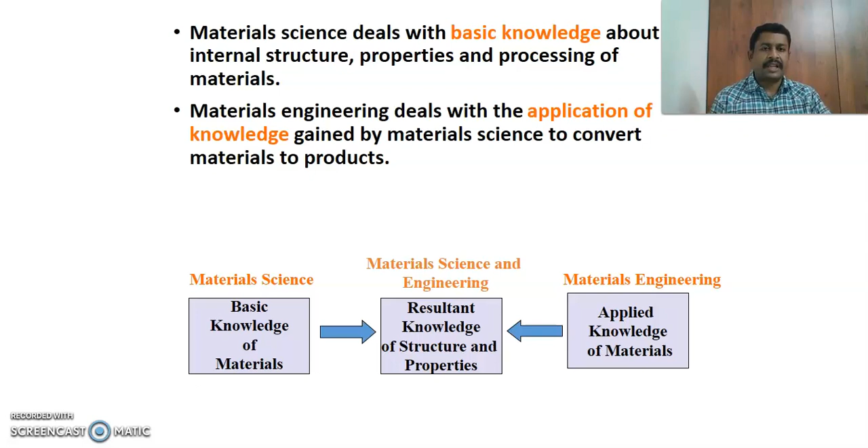There are different types of materials available. The first one is metallic materials and non-metallic materials. Metals and alloys are classified into ferrous and non-ferrous. Ferrous materials means they contain iron content. Examples of ferrous materials are steel and cast iron, and non-ferrous materials do not have iron content.

In ferrous materials, iron is the prime constituent, but in non-ferrous materials, iron is not the prime constituent. Examples of ferrous materials are steel and cast iron, and examples of non-ferrous materials are copper and aluminium. Metallic material is composed of one or more elements, like iron, copper, and aluminium. A metallic element may combine with a non-metallic element, such as silicon carbide, iron oxide, etc. These inorganic materials have a crystalline structure and are very good thermal and electrical conductors.

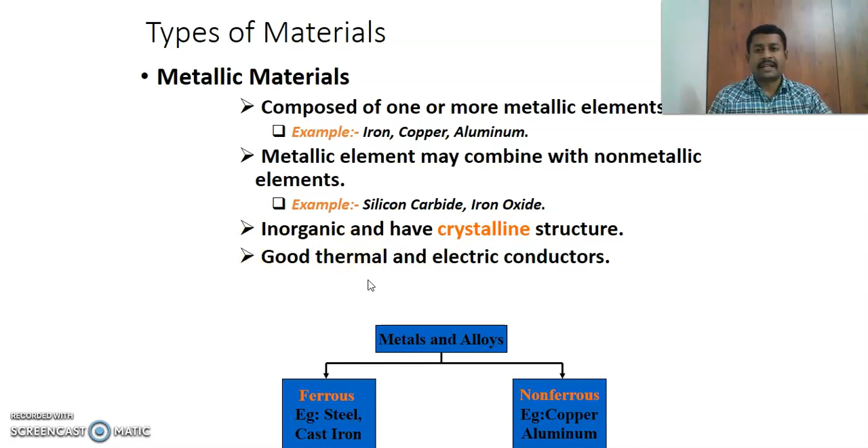In this video, we will mainly study mechanical properties of materials. Before that, what are all the material properties available? There are n number of material properties: first is physical property, second is chemical property, third is electrical property, fourth is magnetic property, fifth is thermal property, next is technological property, and others are aesthetic, economic, optical, acoustical, physico-chemical, psycho-chemical, and other properties.

Physical properties include density, diameter, thickness, and strength-to-weight ratio. Those kinds of properties are called physical properties. Chemical properties include chemical structure, atomic weight, atomic radius, and chemical composition present in the particular material, which are called chemical properties.

Electrical properties include electrical conductivity and electrical resistance, possessed by the material. Magnetic properties determine whether the material is magnetic or non-magnetic, including hysteresis losses; these are called magnetic properties. Thermal properties relate to heat conduction, convection, and radiation - whether it's a heat insulating material or a thermal conducting material, these are called thermal properties.

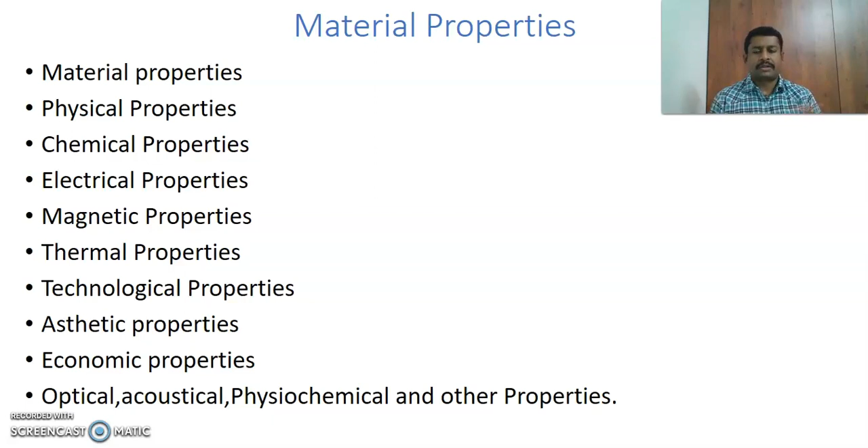Then only we go for applications. Based on the properties, we put the particular material in particular applications. So without knowing the material properties, we cannot go for material applications. So that's why we study one by one what are the properties possessed, what are the characteristics possessed in that particular material. So these are the material properties.

And next we go for the topic mechanical properties and testing. What are the mechanical properties available? So here, generally telling what are the material properties available in the last slide: physical property, optical property, chemical property, mechanical property, acoustic property, electrical property, thermal property.

So those are the general category of properties. Here we can specifically talk about mechanical properties and its testing of materials. So here we are only concentrated about mechanical properties. So what are the mechanical properties available?

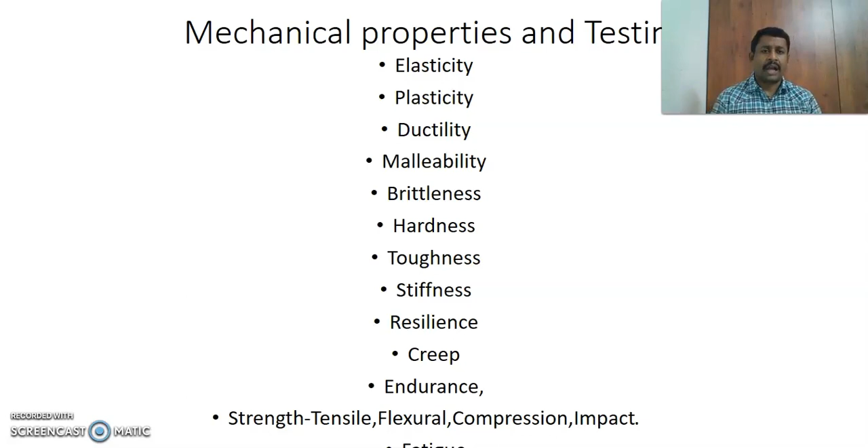That is elasticity, plasticity, ductility, malleability, brittleness, hardness, toughness, stiffness, resilience, creep, fatigue strength, impact strength, endurance limit, flexural strength, compressive strength, tensile strength. So lot more mechanical properties are available. So here we can study one by one.

Before going to know the mechanical properties and its testing, we have to know about the mechanism of plastic deformation, that is mechanism of plastic deformation in the kind of slip and twinning. In the first one, plastic deformation. So what is plastic deformation?

Plastic deformation is a change of material dimension remaining after the removal of load. So after removing the load, what are the material dimension changes? That is change in length, change in diameter, change in height, weight, whatever it may be. That caused by removal of load, the material causes one type of deformation, that is called plastic deformation.

And next one, slip. Slip may be defined as sliding of blocks of crystal over one another along a particular crystallographic plane. So that sliding of crystal blocks over one another is called slip.

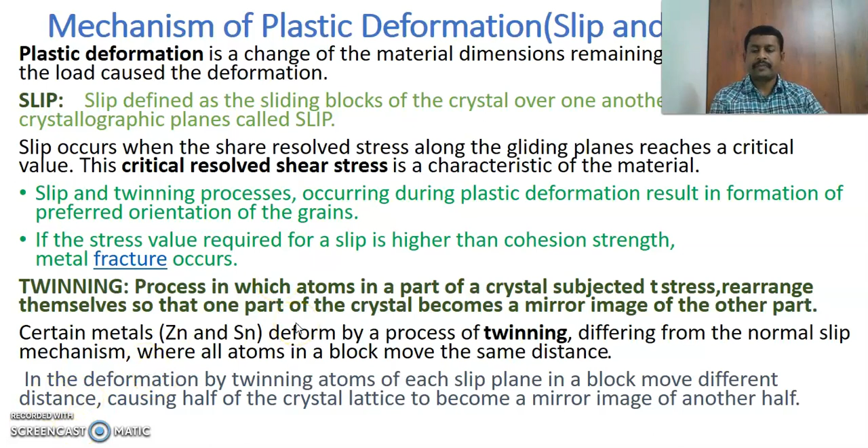This plastic deformation is accompanied by changing both the internal and external state, and it is not reversible. Once it's happened, it's happened. That is permanent deformation that involves distortion of the crystal and microstructure.

This mechanism is carried out in working and shaping processes such as bending, stamping, drawing, spinning, rolling, forging, and extruding. These kinds of shaping processes have to be carried out on a particular material, and plastic deformation will take place.

Examples include the stamping of automobile components, pressing of ship shafting, spinning of aluminum pans, rolling of boiler plates, rails, I-beams, drawing of wire, extension of telephone cables, and forging of crankshafts. All these operations involve plastic deformation in metals and alloys.

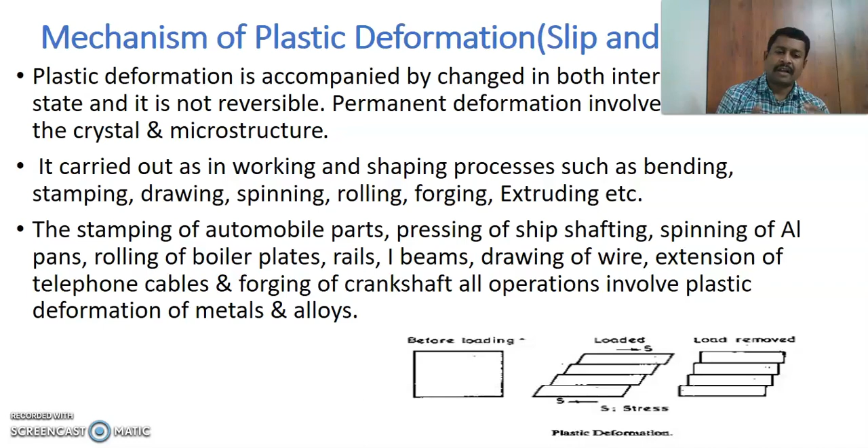Again, the stamping of automobile components, pressing of ship shafting, spinning of aluminum pans, rolling of boiler plates, rails, I-beams, drawing of wire, extension of telephone cables, and forging of crankshafts all involve plastic deformation of metals and alloys.

Now we look at plastic deformation by slip. Slip is defined as the mechanism of deformation where one part of the crystal moves, sliding over another part along a certain crystallographic plane. One block of the crystal moves relative to another along a definite crystallographic plane, called the slip plane. This is the mechanism of deformation where one part of the crystal slips over another part along that particular plane.

Why does this kind of slip occur in metals and alloys? It is due to pure shearing stresses acting across the specimen, irrespective of whether the crystal is subjected to tensile or compressive loads. The specimen subjected to tensile or compressive stress experiences pure shearing stress acting across it, causing slip to occur.

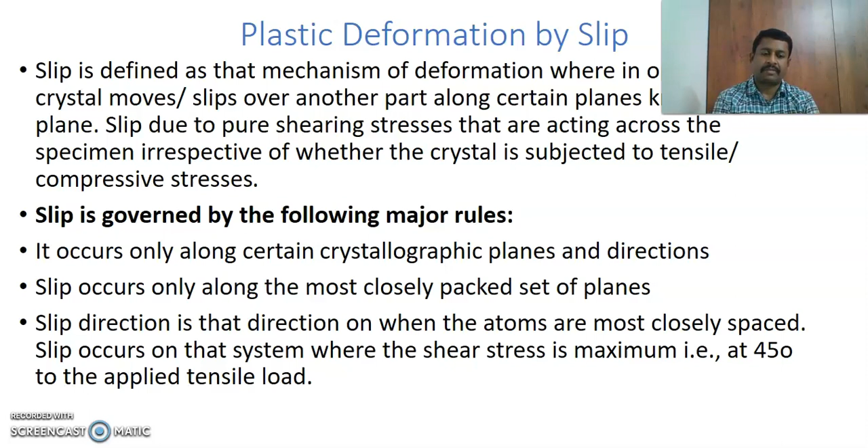Slip is governed by certain rules. First, it occurs only along a particular crystallographic plane and direction, specifically along the most closely packed set of planes. The slip direction is the direction in which atoms are most closely packed, and slip occurs in that particular crystallographic plane and direction. Slip also occurs on the system where shear stress is maximum, for example at 45 degrees to the applied tensile force.

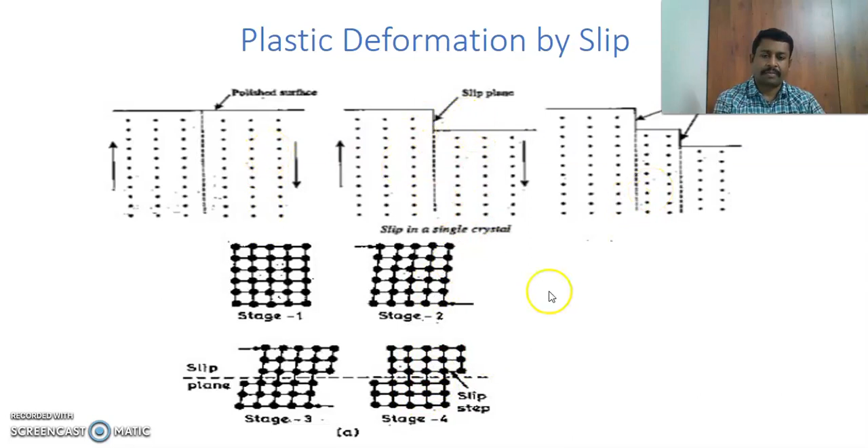Now we discuss the mechanism of plastic deformation by twinning. Here, partial dislocation line moves up and down by one plane, each time the twinning dislocation goes around it. This twinning process may be created by impact, thermal deformation, or thermal treatment involving plastic deformation.

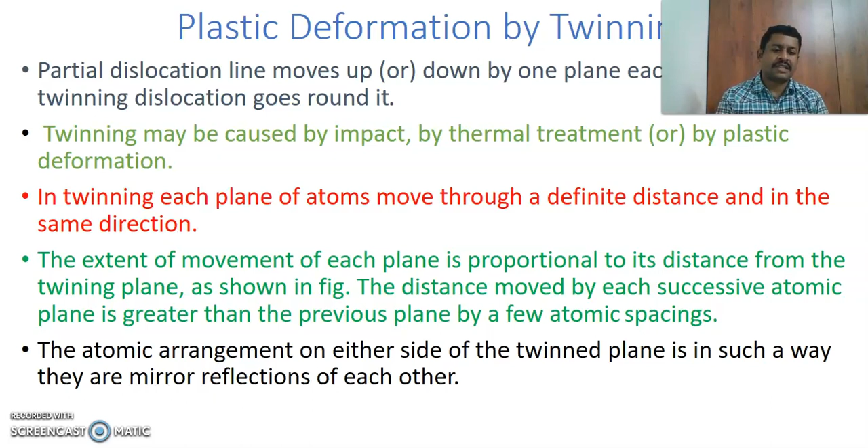In twinning, each plane of atoms moves through a particular distance in the same direction. The extent of movement of each plane is proportional to its distance from the twinning plane, as shown in the diagram, with each successive atomic plane moving a distance greater than the previous one by a few atomic spacings. The atomic arrangement on either side of the twin plane mirrors each other. This is plastic deformation by twinning, showing the twinning plane and twinning direction.

This is the twinned region.

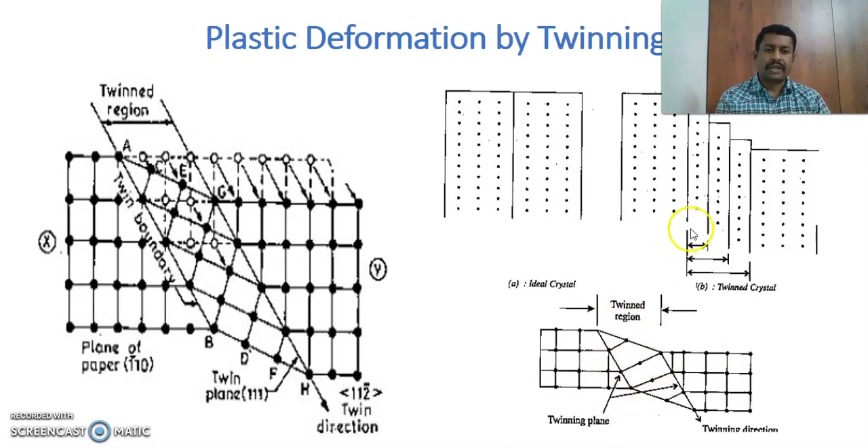We differentiate by slip and twinning, crystal slip and twinning. Slip is the line defect, and twinning is the surface defect or grain boundary defect.

During the slip process, all the atoms in a particular block move the same distance, but in twinning, atoms in each successive plane in a block move through different distances proportional to their distance from the twinning plane.

Slip is commonly observed in BCC and FCC structures of metals, that is body centered cubic and face centered cubic structures. Twinning is commonly observed in hexagonally closed packed structures of metals.

After slip, the crystal axis remains the same, but after twinning, the crystal axis may be deformed. In the slip process, the crystal lattice has the same orientation, but in twinning, the crystal lattice is the mirror image of the original lattice.

The stress needed for slip is comparatively very low, but the stress needed for twinning is comparatively more when compared to slip. Slip can be seen as a thin line under a microscope, but twinning can be seen as a broad line, also viewed under a microscope.

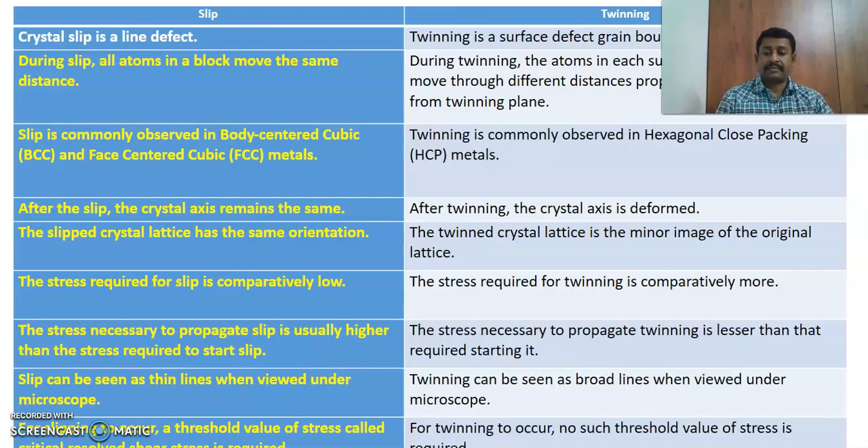Next, fracture of metals and alloys. The process of breaking a solid into a number of pieces due to resultant force acting under stress is called fracture.

There are two stages of fracture: crack formation and crack propagation.

In this classification, the first one is ductile fracture. Ductile materials undergo considerable plastic deformation and absorb a significant amount of energy before fracture. A crack formed as a result of ductile fracture propagates very slowly as the stress is increased.

Plastic deformation in a multi-phase material creates formation of voids at inclusions in the boundaries also. These holes or voids give the specific appearance of the ductile fracture surface, consisting of numerous spherical micro cavities, or dimples, that initiate the crack, and then the crack propagates and fracture occurs.

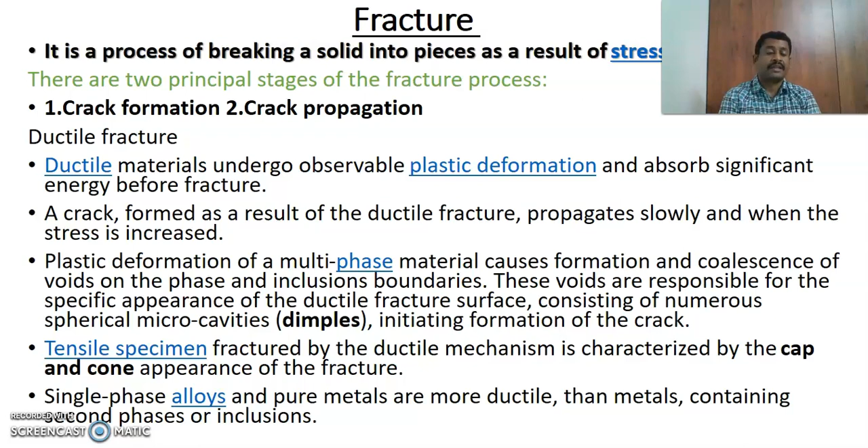Up to now we've seen ductile fracture. Another type is brittle fracture, which shows very low plastic deformation and low energy absorption before fracture occurs.

The crack formed as a result of brittle fracture propagates fast without much increase in the stress applied to the metal or alloy. This brittle crack is perpendicular to the stress direction.

There are two possible ways of brittle fracture: transcrystalline, or transgranular cleavage, and intercrystalline, that is intergranular fracture.

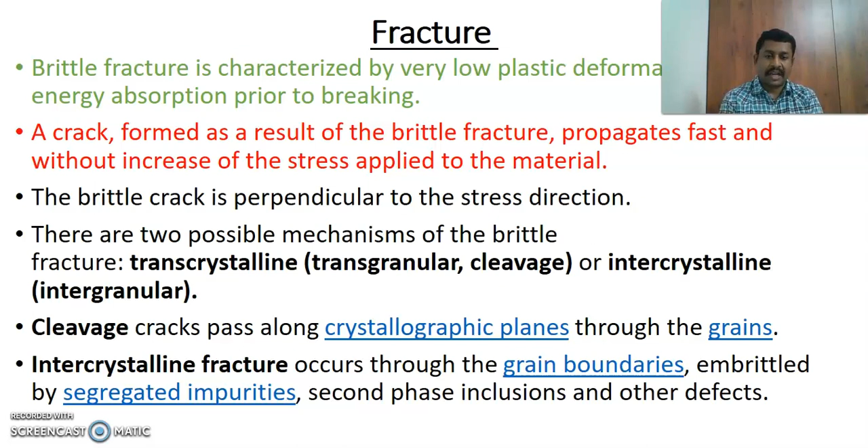Cleavage cracks pass along the crystallographic plane through the grains, while intercrystalline fracture occurs through the grain boundaries that are embrittled by segregated impurities, second phase, inclusions or other defects.

This is the ductile and brittle fracture mechanism. In the schematic diagram, stress is applied in this direction for ductile fracture, and this is the brittle fracture.

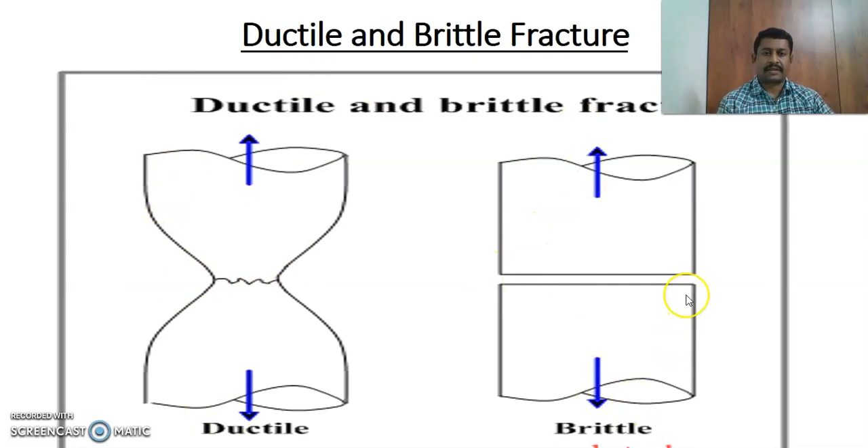How do we test the material under compression, shear and tensile loads? Before we get into testing of materials, there are two kinds of testing available: first is destructive testing, and second is non-destructive testing.

Mechanical tests may be grouped into destructive and non-destructive tests. Destructive tests are tests which are carried out to the point of the specimen's failure. As the name shows, destructive testing means we have to destroy the material and then find its properties.

That is, we have to destroy the material, waste the material, fracture the material, cause failure in the material, and then find the properties of the material. That is called destructive testing.

Examples of destructive testing are the tensile test, compressive test, hardness test, shear test, Izod test, and impact test. For those kinds of tests, we have to prepare a specimen and then break it. After applying the load, the material will be destroyed.

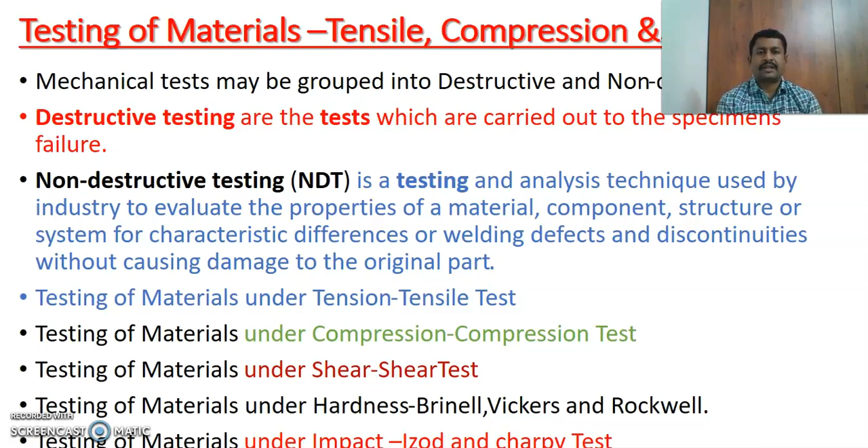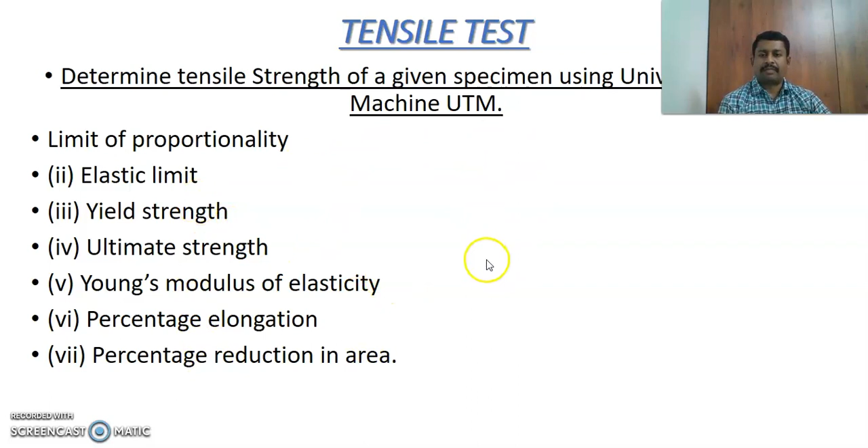So the first one, tensile test, is used to find the tensile strength of a given specimen. In this test we have to find the elastic limit, yield strength, ultimate tensile strength, Young's modulus, percentage of elongation, and reduction in the respective area. These are the properties we have to study while conducting the tensile testing.

This is the tensile test universal testing machine. These are the specimens, and we have to place the specimen in this position and apply the tensile load. This is the specimen, this is the upper jaw, this is the lower jaw, this is the vertical frame, and we have to move the jaw.

The reading is noted here, and this is the elastic deformation up to this point. Here necking occurs, and finally the necking fracture. Fracture will occur in the tensile testing specimen. This is the fractured strength, and this is the necking. This peak point is called the ultimate tensile strength, and here we draw the curve. So necking and fracture occur here, and this is called tensile testing.

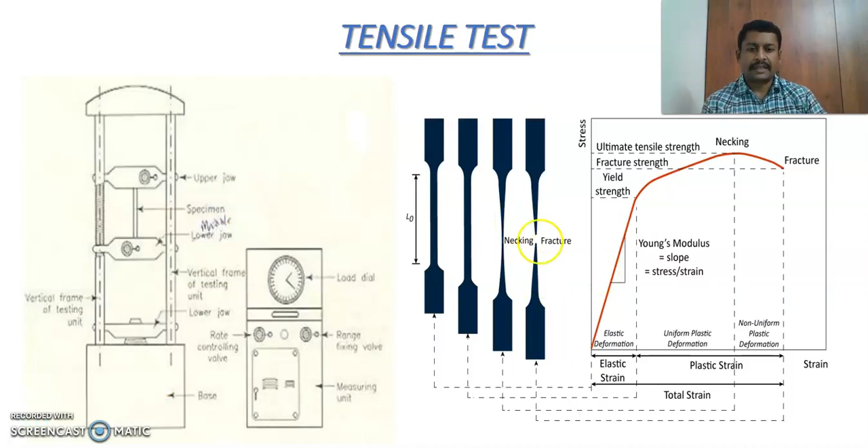In this tensile test specimen, this is the overall length, and the distance between two shoulders is the gauge length. This is the width of the specimen, this is the gripping section, and these two sides are the gripping sections.

When we put the specimen into the tensile testing machine, specimens are placed in the grips of the universal testing machine at a specified grip separation, and the specimen is pulled, that is, tensile force is applied, until the specimen fractures. The American Society for Testing and Materials standard ASTM D3039 is used, where test speed

can be defined by the material specification or time to failure, that is 1 to 10 minutes depending upon the material. The test speed for standard test specimens is 2 mm per minute, that is 0.05 inch per minute. An extensometer or strain gauge is used to find the elongation and tensile modulus. Based on the reinforcement and type of testing, more than one orientation may be needed.

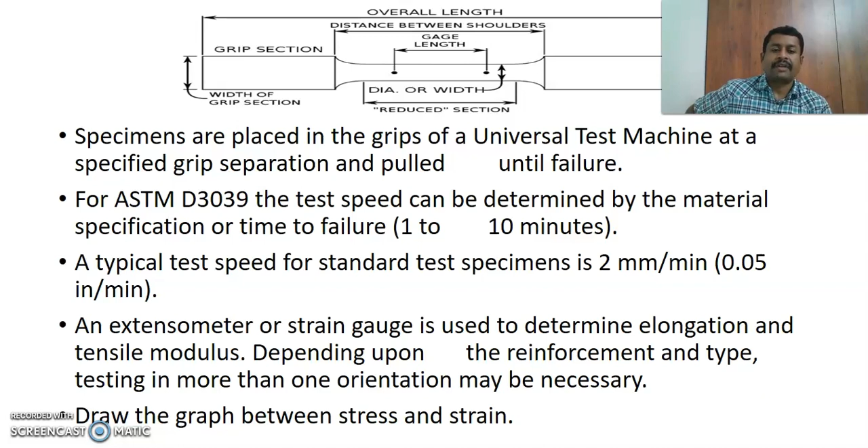Finally, a graph is drawn between stress and strain. There are some applications of tensile testing. Based on the tensile testing, we have to use the material.

In aerospace areas, turbine blades undergo this kind of tensile testing, and automotive seat belts, bumpers, and mud flaps are put into the tensile test before being used. In packaging, ring pulls and tight packing also require tensile testing.

And in sporting areas, racket strings are tightly tied together, and before they come into application, we have to perform the tensile test.

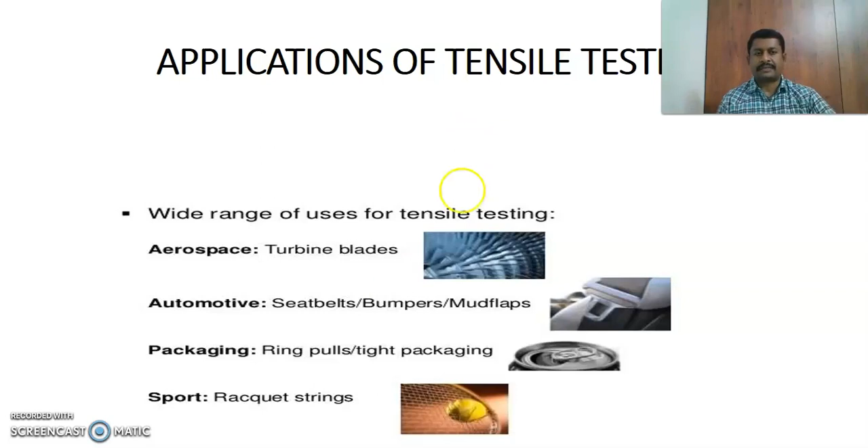Next is the compression test, which is carried out on the cubic material. This test is to study the behavior of the given material under compressive load. The original dimensions of the specimen, like original diameter and gauge length, etc., are noted.

The specimen is mounted on the universal testing machine between the fixed and movable jaw. The load range on the machine is adjusted to its maximum capacity, which is 300 kilonewton, and the dial gauge is mounted on the machine at the appropriate position and finally adjusted to zero.

Now the machine is switched on and the compressive load is applied gradually. Tensile load is pulled like this, and compressive load is compressed like this. So finally, the compressive load is applied gradually.

Every 10 kilonewton of load is gradually applied, and the reading of the dial gauge is noted and finally tabulated.

After that, remove the dial gauge slightly below the expected load up to the yield point, and record the load at that yield point. At the yield point, the pointer on the load scale will remain stationary for a small interval of time, and the needle will come back by 1 or 2 divisions. That point is the lower yield point.

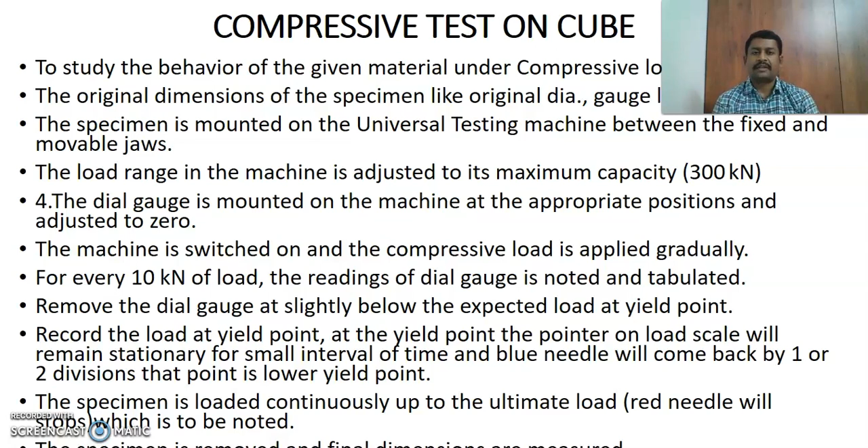The specimen is loaded continuously up to the ultimate load, which is to be noted. Finally, the maximum limit of compressive load should be calculated.

Finally, a graph is drawn between plastic deformation, strain - that is, compression - versus stress versus strain. This is for compressive load. So finally, after the compressive load is applied, this is what happens to the specimen.

This is the specimen before testing, and this is the specimen after testing - it will look like this. Here, before the test and after, in terms of height and diameter: after brittle fracture, the brittle material will fracture like this, while the ductile material will deform and its shape will change like this.

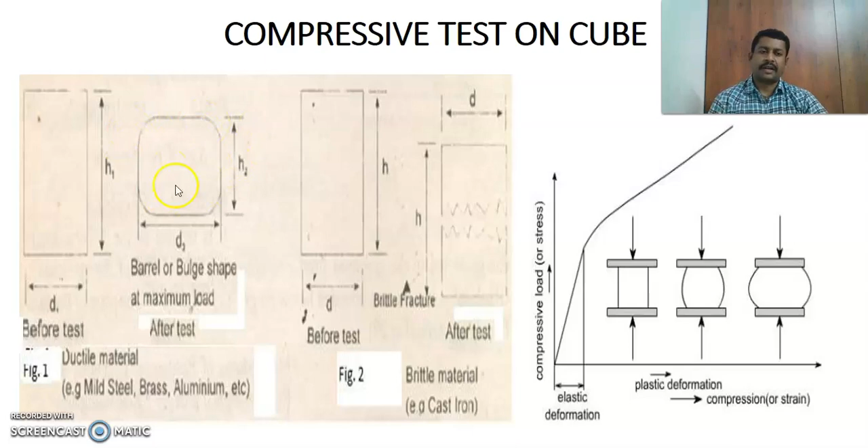Next is the shear test, a mechanical property test done to find out the shear strength of the given specimen using the universal testing machine.

Shear force is the type of force that causes two contiguous parts of the body to slide relative to each other in a direction parallel to their plane of contact. The stress needed to produce a fracture in that particular plane of cross section, acted on by the shear force, is called shear strength.

We insert the specimen in the particular position and grip one end of the attachment in the upper portion of the specimen and the other end in the lower position. We bring the drag indicator in contact with the main indicator, select a suitable range of load, and place the corresponding weight in the machine.

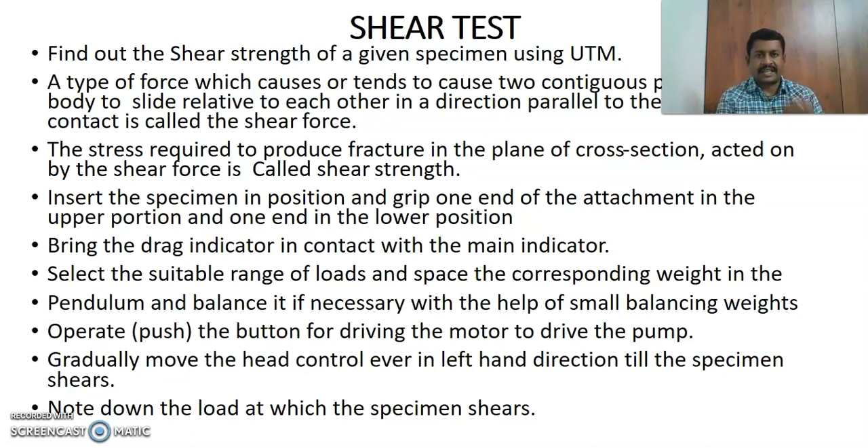Balance the pendulum if necessary with the help of a small balancing weight. Push the button to drive the motor, which drives the pump, then gradually move the head control lever in the left-hand direction until the specimen shears. We note the load at which the specimen shears - this is called the shear test.

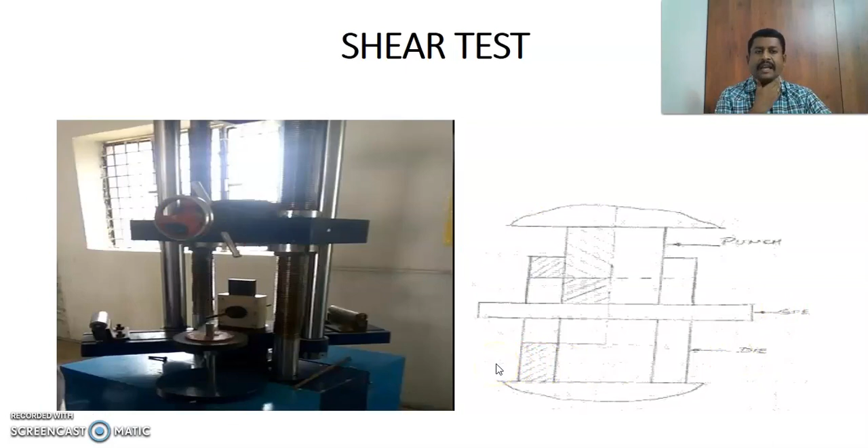This is the diagrammatic view of the shear testing machine. We also have the Brinell hardness test, used to test the hardness of a particular metal or alloy - to find the hardness of the given specimen using the Brinell hardness test.

In the Brinell hardness test, a steel ball of diameter D is forced under a load F onto the surface of the test specimen. We place the test specimen for this.

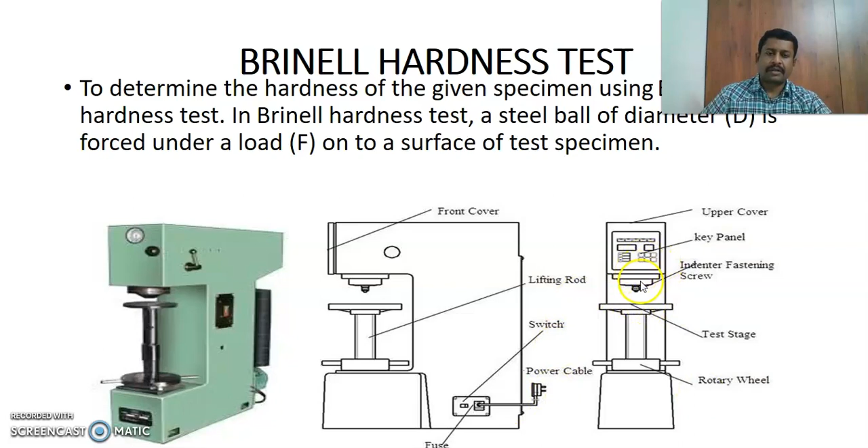This is the testing procedure: insert a ball of diameter D into the ball holder of the Brinell hardness testing machine. The specimen surface is cleaned before placing the testing specimen - it should not contain oil, grease, dust, etc.

Make contact between the specimen surface and the ball using the jack adjusting wheel. Push the required button for loading, pull the load release lever, and wait for 15 seconds.

Remove the specimen from the support table and locate the indentation. View the indentation through the microscope and measure its diameter D using the micrometer fixed on the microscope. Repeat the procedure and take two or more additional readings, then calculate the average.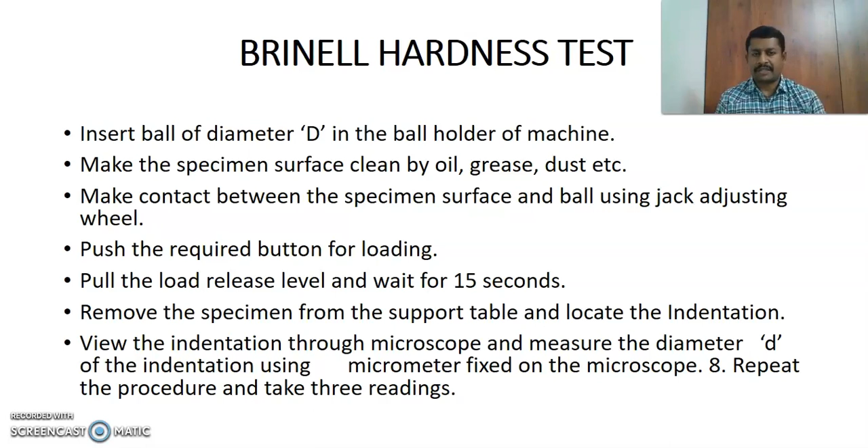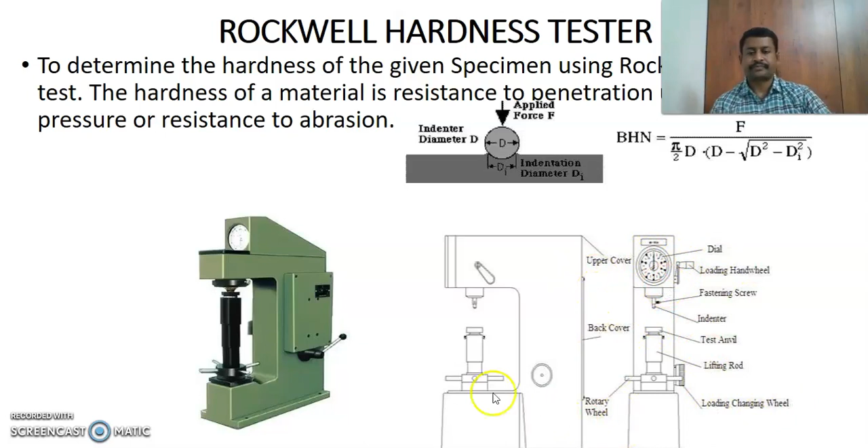Here the indenter is placed, and here we place the testing material and the lifting rod. This is the loading changing mechanism, and this is the dial. This is the upper cover, back cover, and this is the diagrammatic view of the Rockwell hardness test.

We have to place the specimen on the platform given in the machine, and using the elevating screw, raise the platform and bring the specimen just in contact with the ball. Apply the initial load until the small pointer shows the red mark, and release the operating valve to apply the additional load. Immediately after the additional load is applied, bring back the operating valve to its position and read the position of the pointer on the C scale, which gives the hardness number.

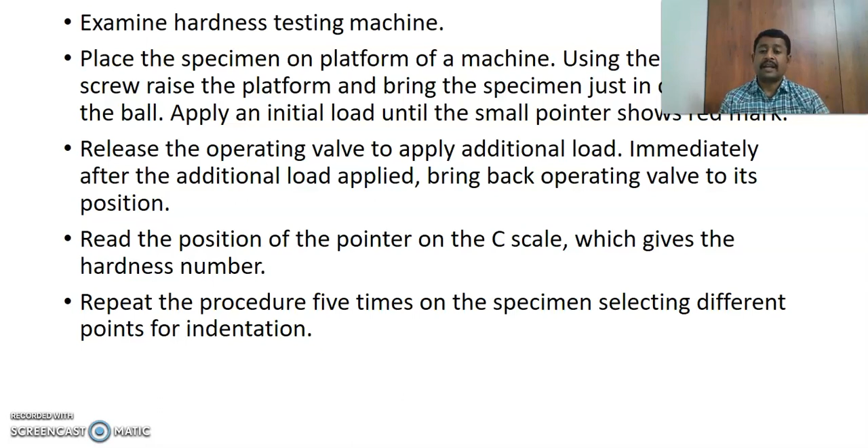Repeat the procedure 3 to 5 times on the specimen, selecting different points of indentation, and finally calculate the average to determine the hardness. Likewise, the Vickers hardness test is also performed.

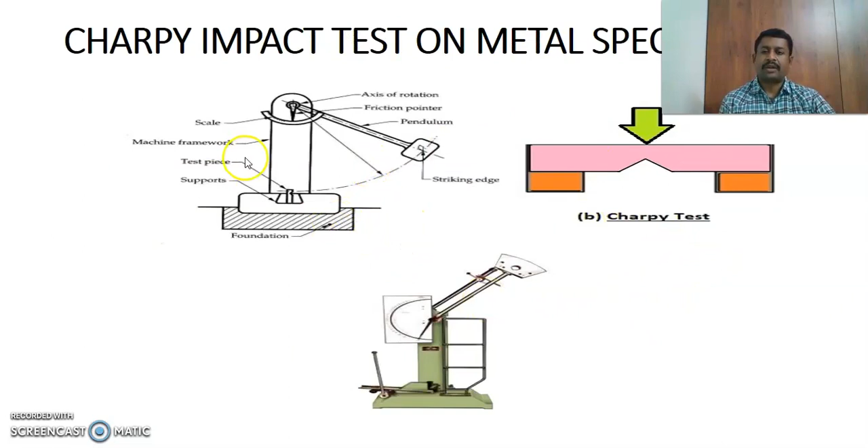Charpy impact testing machine: impact testing involves applying a certain load to a particular specimen, and this is called the Charpy test. A proper striker is fitted to the bottom of the hammer with the help of a clamping piece. The latch for the Charpy test is firmly fitted on the bearing housing at the side of the columns.

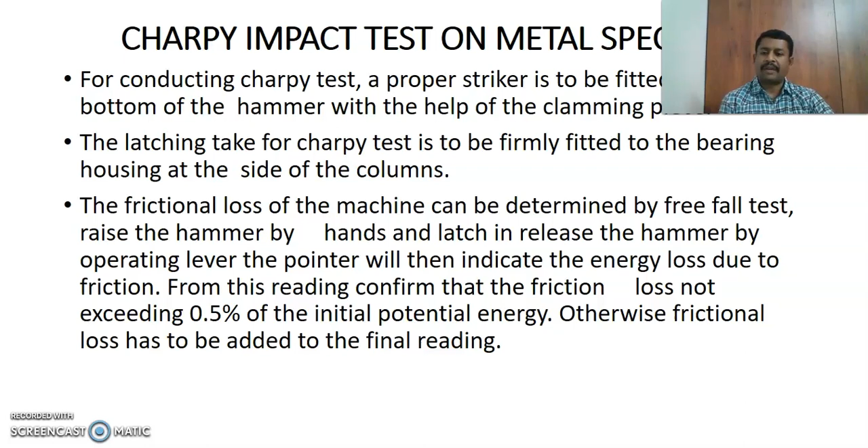The frictional losses can be found through the free fall of the test, by raising the hammer by hand and latching it, then releasing the hammer by operating the lever. The pointer will then indicate the energy loss due to friction.

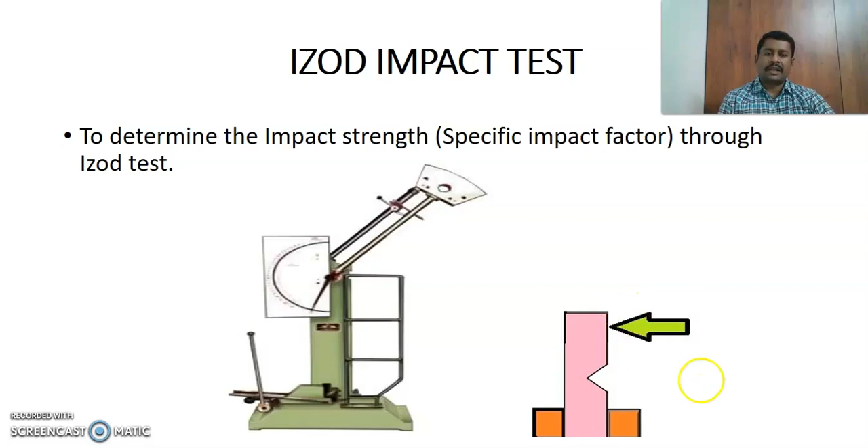This is the Izod impact test, used to find the impact strength. Impact is the sudden, frequently or immediately applied load leading to fracture of the material. So impact factor is found through Izod testing.

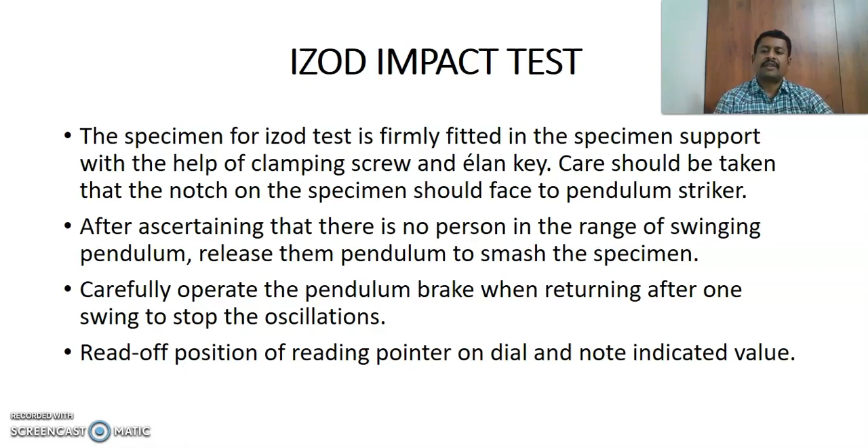In Izod testing, we have to carefully operate the pendulum brake when it returns after one swing, to stop the oscillation, and then calculate the impact value in terms of joules.

The main comparison between Charpy and Izod impact testing: the materials used in Charpy test are metals, but Izod impact test is for plastics. The types of notches differ too - Charpy impact testing machine uses U and V notches, but Izod testing machine uses only V notch.

The position of the specimen in Charpy is horizontal, but in Izod impact testing machine the position of the specimen is vertical. The striking point for Charpy impact testing is the middle of the sample, but for Izod impact testing machine it is the upper tip of the sample.

Common specifications used are ASTM E23, ISO 148 or EN 10045 for Charpy, and for Izod testing machine ASTM D256, ASTM E23 and ISO 180.

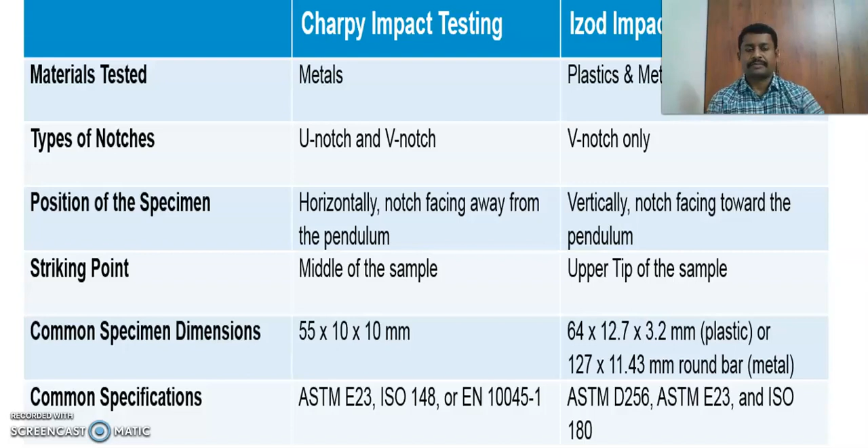Fatigue test: in a fatigue test, the material is subjected to repeated cyclic load. The material fails at a stress below the yield point stress. Such a type of failure of a material is called fatigue.

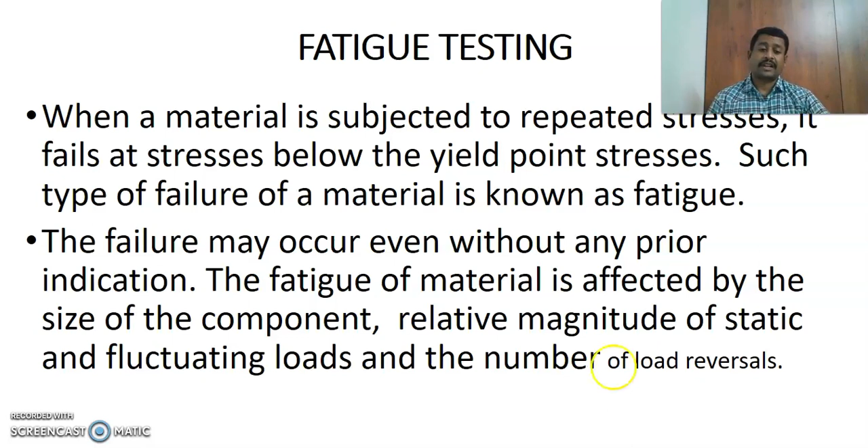The failure may occur even without prior indication - we are not aware the failure will occur, but it may happen. The fatigue of a material is affected by the size of the component, the relative magnitude of static and fluctuating loads, and the number of load reversals.

The specimen is placed in the machine and force is applied via bending moment. The force induces a surface stress that is tensile on one side of the sample and compressive on the opposite side. When the test is initiated, the sample rotates at a particular rate, and this rotation causes the surfaces to interchange, so that each surface experiences alternating tensile and compressive loads.

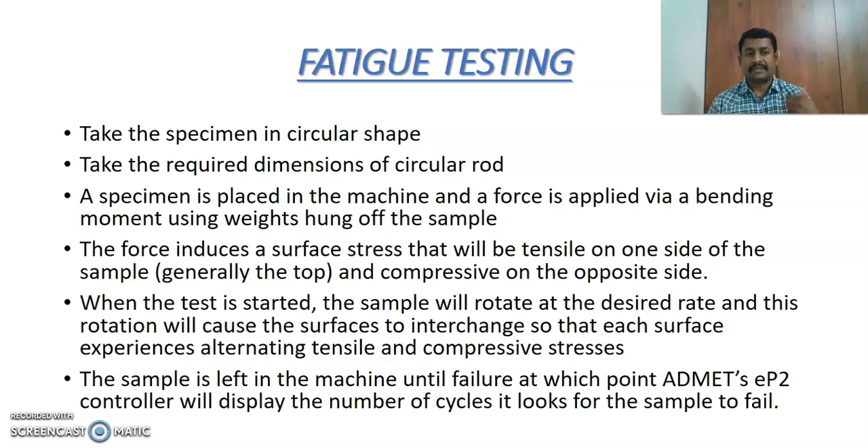So one side experiences tensile load and the other side compressive load. The sample is left in the machine until fracture. Finally, the controller displays the number of cycles it took for the sample to fail - how many cycles it will take for the sample to fail. That is called the fatigue test.

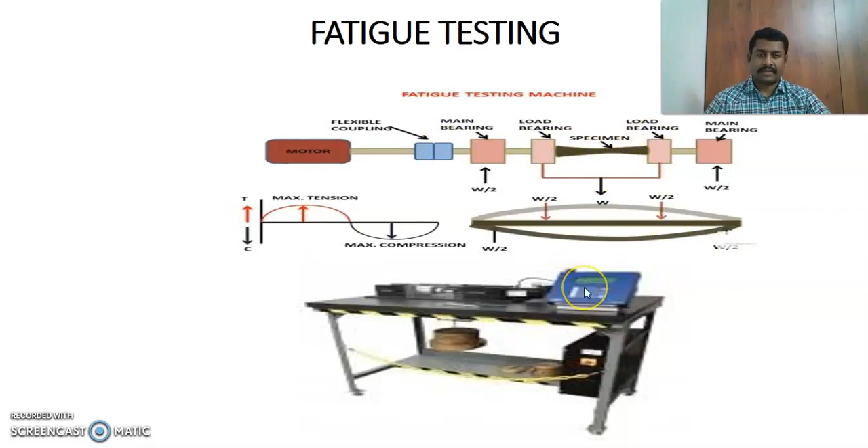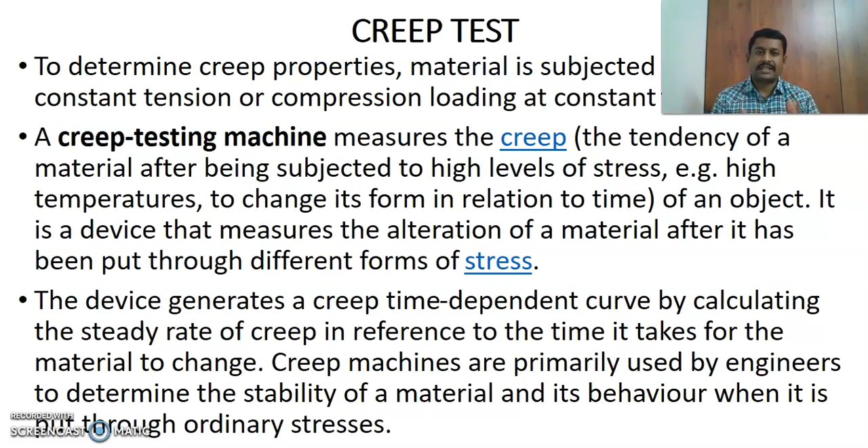And the creep test: the material is subjected to prolonged constant tension or compression - prolonged constant tension and compression loading at constant...